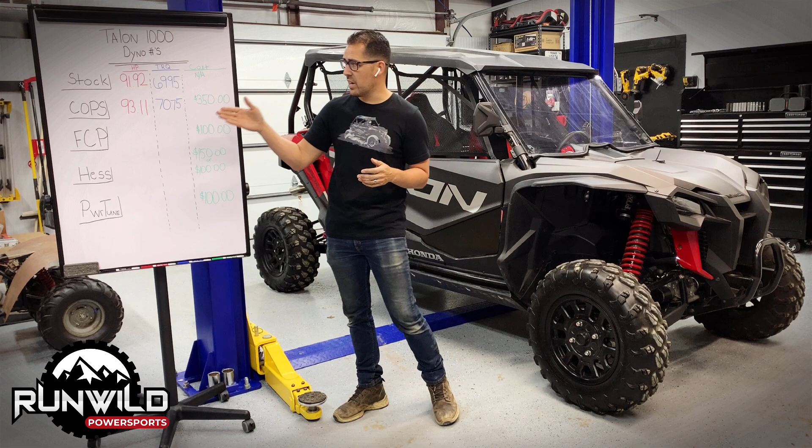So now we have our first tune on the board, and looking at COPS, it produced 93.11 horsepower and 70.75 foot-pounds of torque. So we see almost 1 foot-pound of torque increase on the torque, and then as far as the horsepower, again, a little less than 1 1/4 horsepower increase. So let's just make our way down the list. Let's go to FCP, see what kind of numbers they put up on the board.

All right, so now we have the FCP run done, and looking at the board, we increased a little bit over COPS and over the stock to 93.75 horsepower, and then torque we went up to 71.02, so maybe about a quarter foot-pound of torque, and then over stock about 1 foot-pound of torque. Again, nothing ridiculously crazy, but let's keep making our way down the line. We have Hess up next. Let's take a look at their pull.

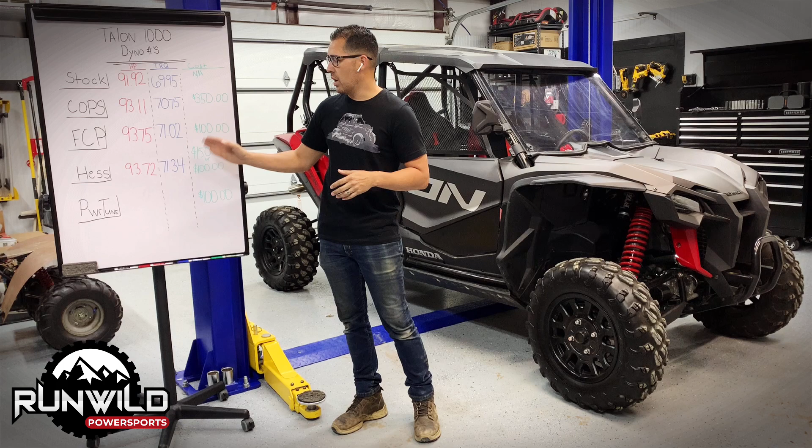All right, we're making our way pretty quickly through these pulls. We have Hess up next on the board, and horsepower wise, 93.72, roughly about the same. But the torque, we went up. We went to 71.34 on the torque side. So we're making our way up over stock. We're about 1.5 foot-pounds of torque up over stock. Horsepower, we're still sitting around the same range we were there. Now let's go to Pwr Tune. Let's see what kind of numbers we get from them.

All right, so we have the last number on the board here, the run from Pwr Tune, and we can see there's 93.74 horsepower and 71.35 foot-pounds of torque. It's very similar to the Hess tune, which makes sense. Again, both of these companies have in-house dynos that they're using to tweak their tune. So it would make sense that these two companies are very close to both their horsepower and their foot-pounds of torque.

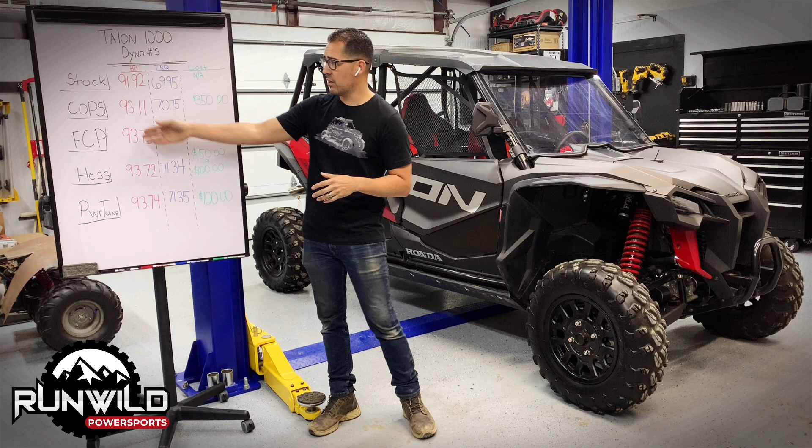That being said, I invite you to reach out to these companies, talk to them directly. These are things that we see on the dyno, but they can give you more background as far as how they build a tune, what technology they're using. A company like Hess, they're heavy, heavy into Talon racing. Pwr Tune is very heavy into racing as well, as are some of these. And so it's very important for you to talk to these tuners and find out how much of what you want your machine to do aligns with the way that they build the tunes and run their companies. That's very important for you to build a long relationship with these companies as your machine evolves and you get more modifications on those machines.

So again, stick with us as we go over to part two in the coming week. We're taking this machine to Moab. We're going to have a great time. We're going to do a lot of testing. We'll hopefully have a lot of video to share with you.

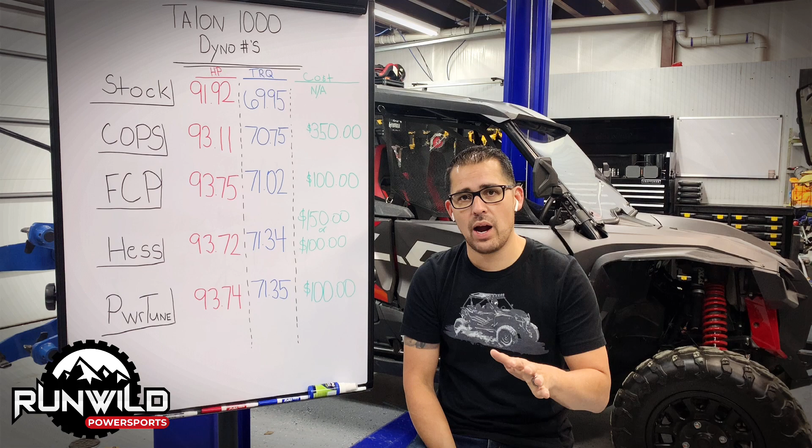The other thing I want to talk about is the gains that we're seeing here are again in line with what we see across not even just Powersports, but in the automotive industry. So when we have a naturally aspirated car with no power adder like a turbocharger or a supercharger, we can see again a 2 to 4% gain. That's about what we can expect from a decent tune. A lot of these motors already have a good amount of their power pulled out from the factory, and so getting a 2 to 4% gain is about what you can expect.

So I don't think these numbers are anything to be disappointed about. And then lastly, these numbers tell literally one part of 100 different parts that make these machines better with these tunes. So all we're looking at here is raw data on horsepower and torque as compared to stock. And all that is cool - we like to see high horsepower numbers on here. But what really makes a difference is the other things that I mentioned earlier in the video.

Like shift points and clutch engagement. Those things make a real big difference when you're actually driving the machine out on the street. And what I wanted to show you is if we look at a power curve - if you look at the dyno readings on our website, you'll see the power curves for all of these compared to stock. And on stock, the redline is 8,400 RPM, and on some of these it's a little over 9,000 RPM.

Now, we saw that about 8,400 RPM is where these machines make their peak power. So the fact that these companies go past that and continue in that gear until they're shifting to another gear - that is something that actually contributes to the vehicle being faster.

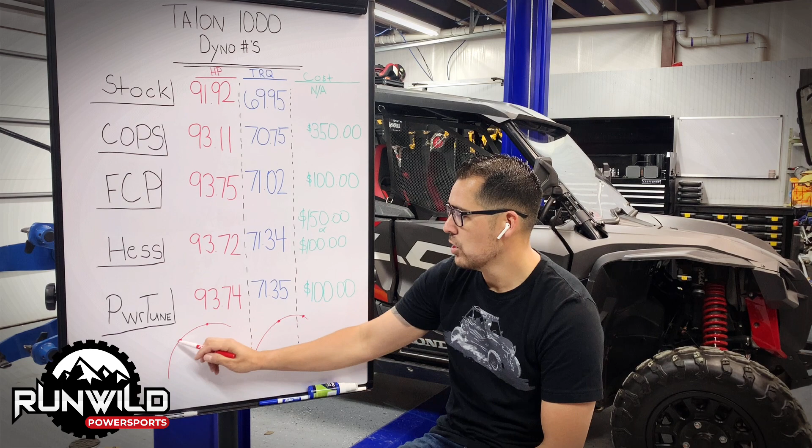And the way I can explain it is, if this power curve is like this - so right here is about 8,400 RPM and it's making the most horsepower - stock would change gears and then drop down to, say, right here in the next gear in the power curve. Whereas over here on, say, the Pwr Tune, say they shift at 9,200 and then now in the next gear they stay here. So we're seeing this drop right here in power.

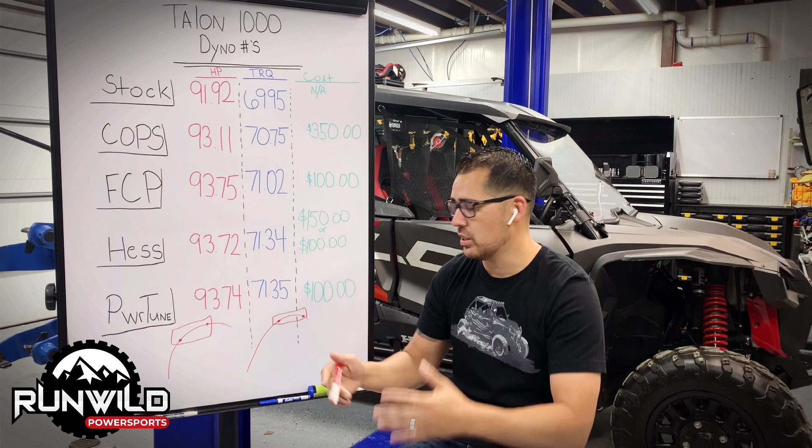And so versus over here with Pwr Tune - and I'm using Pwr Tune as an example, but really it applies to everybody - you stay higher in that power curve as you're driving the machine. So it isn't so much about horsepower increases as it is about staying inside of that power curve. Whenever you look at these companies, those shift points are very important, because then you're going to stay in the power range.

And there's, again, a slew of other things that contribute to the benefit of having one of these tunes. The last thing I want you to do is look at the negligible increase over stock and think that these tunes are a waste of money. They absolutely are not a waste of money. This is something that I would suggest is the first thing anybody does to their machine - get something that makes their machine operate more efficiently.

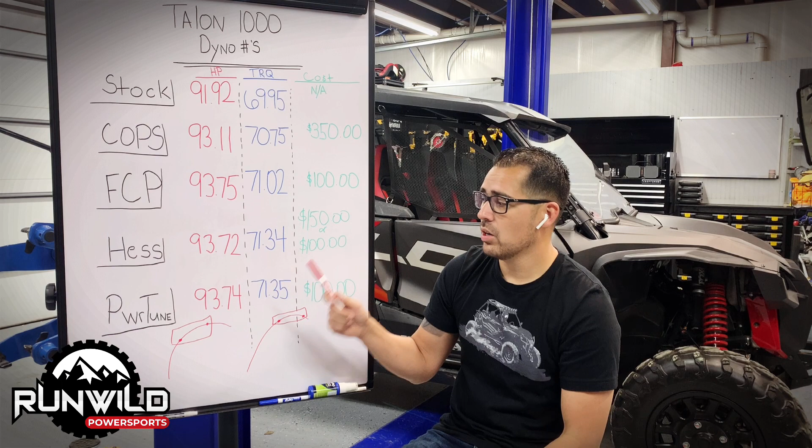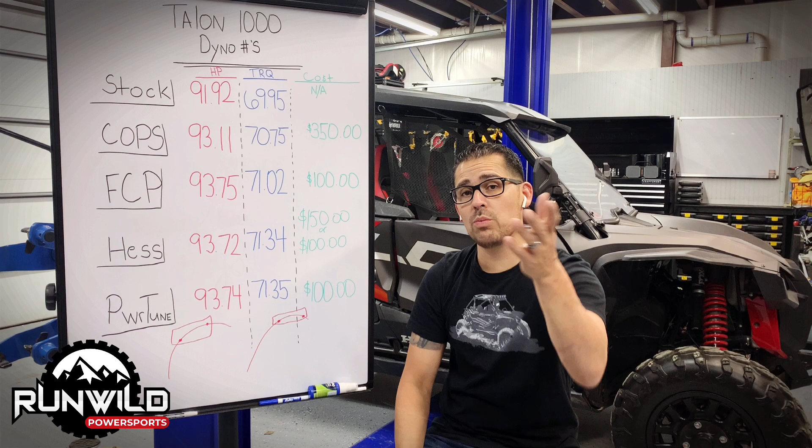And so, again, we're gonna take this machine to Moab next week, and we're gonna put it to the test. We're gonna road test it, and you're gonna start to see these differences that aren't reflected in the horsepower numbers. So I hope you stick with us for part two, and let's see what kind of numbers we get.